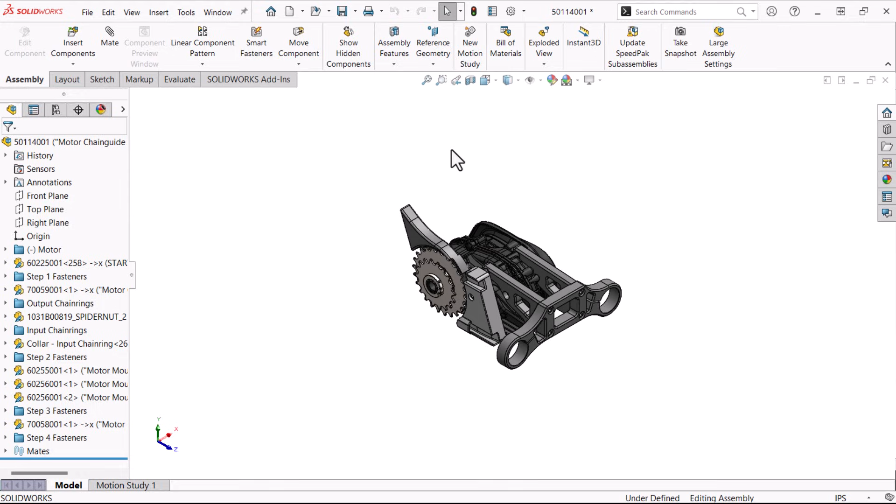Let's get started. After opening the assembly, I'll click Exploded View on the Assembly Command Manager. The first step is to select a component. This displays a triad that is used to move the selected component. I'll drag the component away from the model using the z-axis. Lastly, I'll click Done, not OK. OK will close the exploded view.

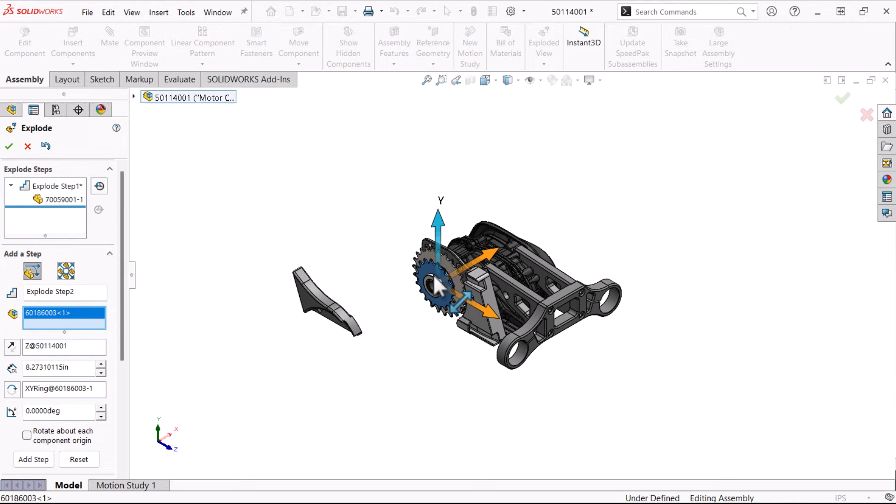The first explode step is listed in the dialog. They will be added in order. We can also select multiple components and move them at the same time in the same direction, the same distance. I'll click the gear and collar components, drag them, and click Done.

Next, I'll select the collar, drag it, and right-click to add the step. Either version of Done can be used to end each step.

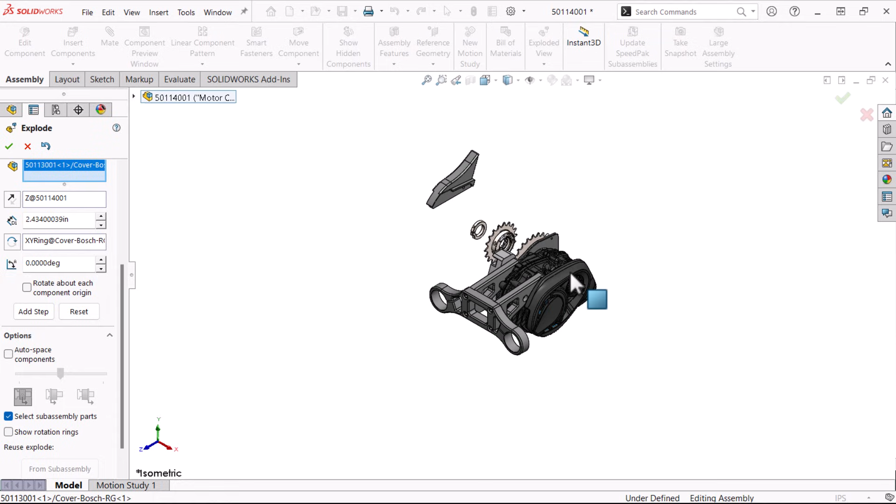When you select a subassembly, you can move the entire subassembly or just the selected component. It depends on the Select Subassembly Parts option. Now it's cleared, so the entire subassembly will move like this. For this explode step, I want just the cover component, so I'll click Select Subassembly Parts. Now I can drag just the single component of the subassembly. I'll select the motor and move it as well.

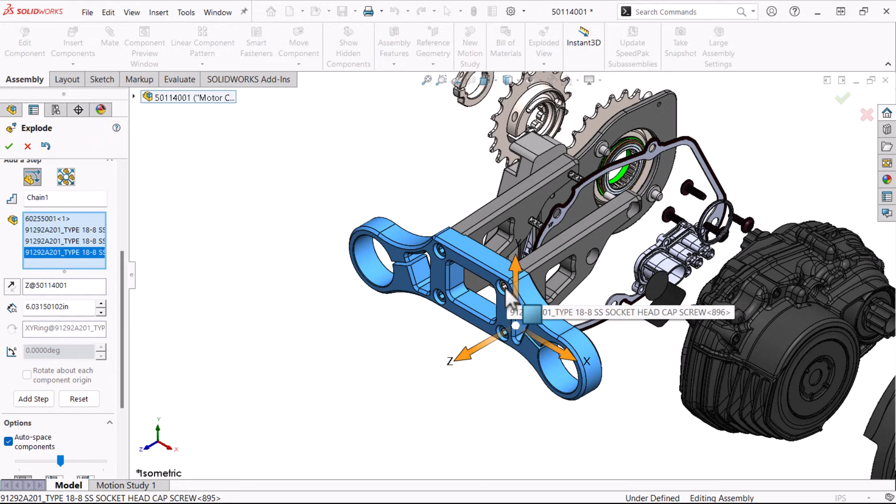Another option is to space the components as you drag them. I'll click Auto Space Components and select 7 components including 4 screws. When I drop the components, they are spaced, but maybe not placed the correct distance away or in the right order.

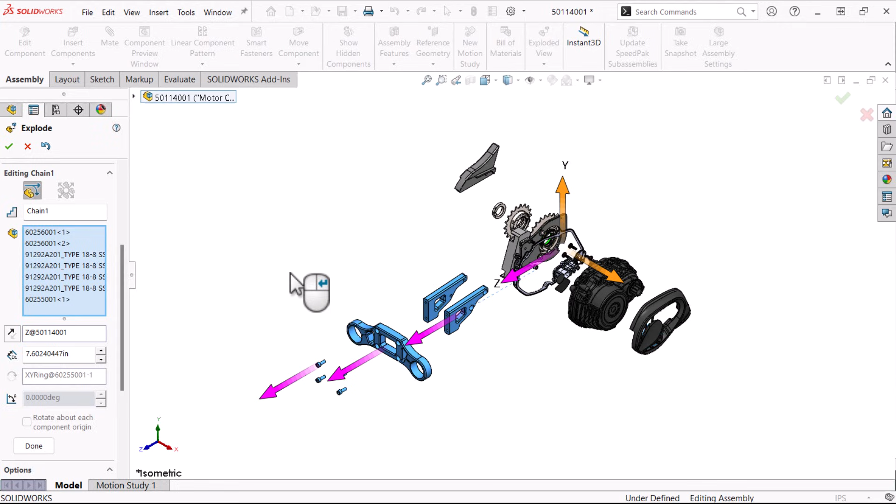If we drag the arrow next to the screws, we can move them out to the front and move the base component back. All of these components have been moved along the X, Y, and Z axes of the triad, but sometimes you need to move them in a different direction.

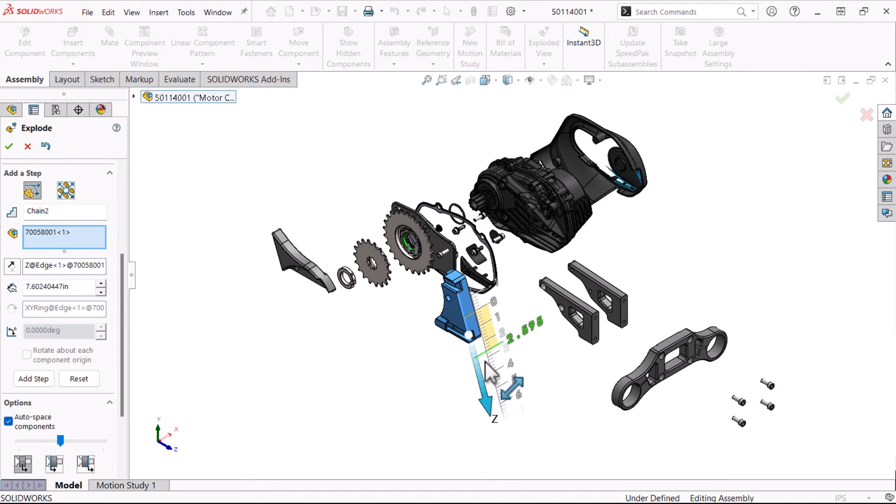To do this, select the component, then drag and drop the center of the triad onto an edge or face. The arrow will point along an edge or normal to the face, then drag the component in that direction. That's all of the steps, so finally I'll click OK.

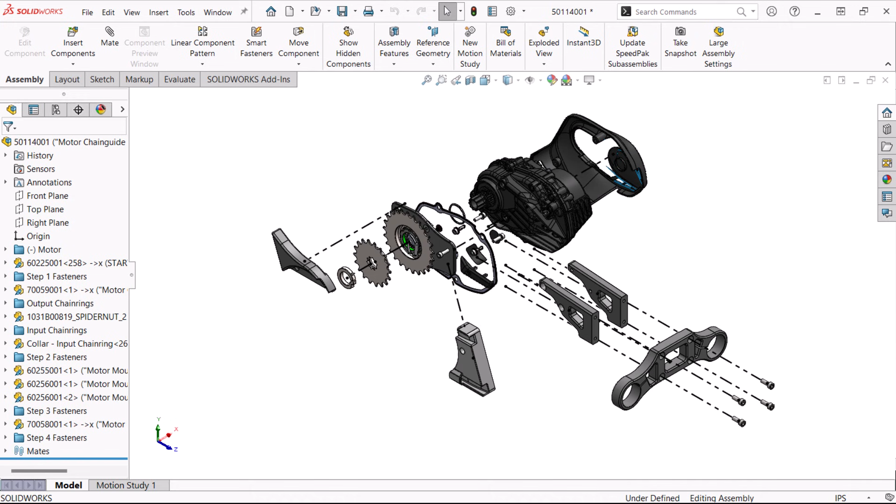Exploded Views is stored in the Configuration Manager section of the Feature Manager design tree. The exploded view can be enhanced with lines connecting the components back to their mated locations, and it can be displayed on a drawing sheet. We can also create exploded views using multi-body parts.